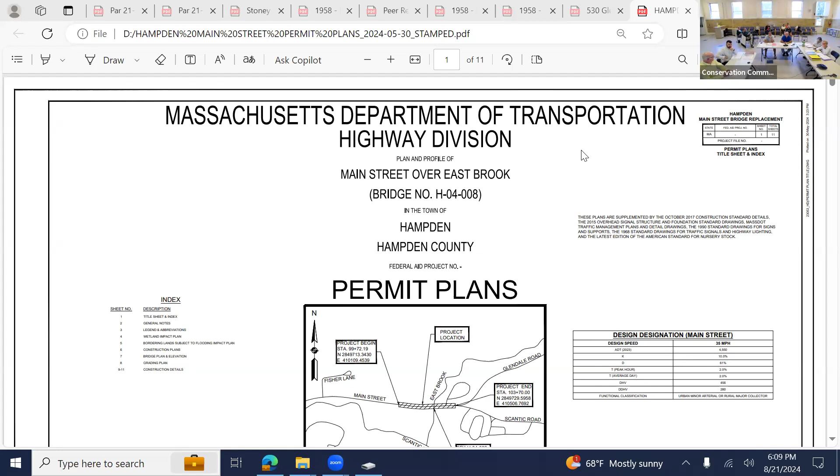If you don't mind going to page 4, please. So I just went through the impacts. This is basically a color-coordinated map showing where these impacts are happening. You can see most of the temporary impacts to the riverfront area are from regrading the slopes, shown in purple there. A lot of it's just regrading the slopes, since we're raising the profile of the roadway a little bit, which creates some grading to be done on either side of the roadway.

Then you have the greenish color, which is the temporary impacts to land underwater. A lot of that's for the removal of the existing abutments of the bridge, which we're doing by creating coffer dams around the existing abutments. So we're not impacting the actual center of the stream itself, but instead damming around the existing abutments to remove and then replace them. You can see how the green stays away from the center of the channel and stays closer to the abutments, because that's where most of the dredging is happening.

Then you have the orange, which is the permanent impacts to the riverfront area. A lot of that is because we're adding in the sidewalk and pedestrian curb ramps on either side of the bridge. We're also putting up updated guardrail at this location because the current guardrail is insufficient, which will also have pavement millings underneath. Technically those aren't considered impervious surface, but it's still a change of impact, since before that was just grass. So those are really our permanent impacts to the riverfront area.

And then you have your permanent bank impacts, which are in red, coming off each end of the bridge. That's because we are widening the bank a little bit. So at each end of the bridge, to get back to the normal bank width, we're having to move those banks out a little bit.

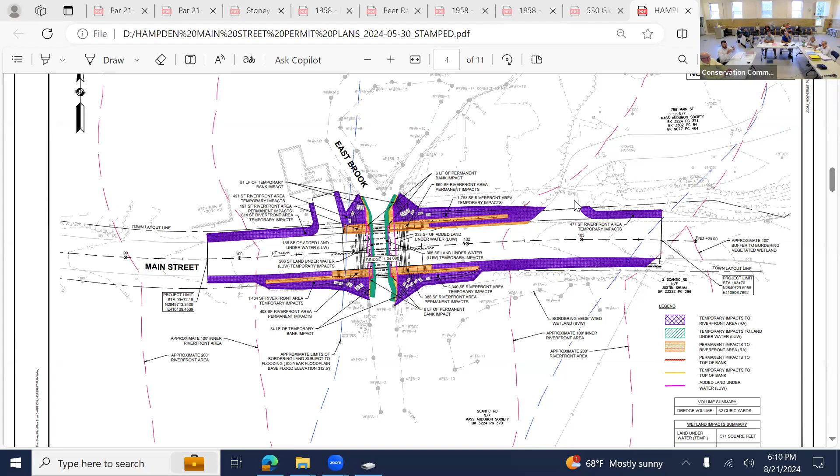If you go to the next one, please. Right here is the area where we're really adding that flood storage elevation. I talked about the 1,855 cubic feet. You can see in green here, a lot of it is happening where we're widening the channel underneath the bridge and doing a lot of bank impacts. You can see how we're flattening things out more.

If you look at the black lines on either side on the 4 quadrants of the bridge, we're really trying to cut in there more and create more of a gradual slope down to the brook itself. As of right now, it just goes right to the bank and drops straight down. So we're really trying to offer more flood storage in those locations for the times when the East Brook swells from big storms.

I'll pass it over to Steve. Sure, I'll continue. So one of the key things of this project is improving the structure that's there now in conformance with the stream crossing standards to the greatest extent practical. A lot of what's on this plan right now, we're calling new aquatic impacts, but at the end of the day, it's a wider river. It allows for greater capacity during storm flows, but it also allows for different types of aquatic passage.

Right now, what you have is a constricted stream where it's pretty much water face to bridge all the time. When we can show one of the sections of the bridge - I'm not sure what sheet it is in your package, Chris - with the widened structure, the main channel will stay pretty much as it is, but there'll be some added aquatic passage value.

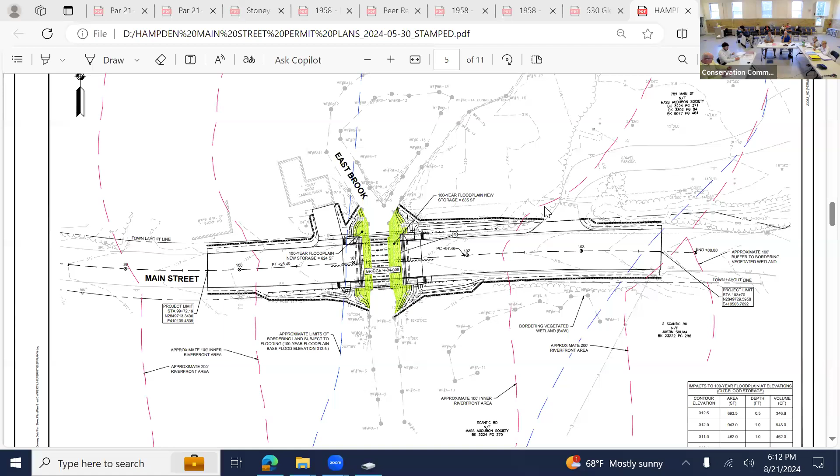You can go 2 up, please. Yep, right here. That gives a better layout of what the passage under the bridge will look like. If you could scroll down a little so we can see the bottom part - in this illustration, in the center, this is existing sheeting that was left in place when they built the previous culvert, and that's basically where your existing channel is.

During construction, coffer dams will be placed right at the face of where the existing abutment wall is, which basically projects up from where this steel sheeting is. This is where the stream gets wide for the wider structure, so there's actually a wider stream bed. There's aquatic passage up here on this bank. So it's both improving storm flows, but also improving the capacity of this structure to be a passage for other wildlife where it's not now.

I wanted to take a little bit of time to address the letters that you got from Division of Fisheries and Wildlife, in particular Natural Heritage and Endangered Species. What I have in front of me is the July 1st letter from Mass Wildlife, and I'm reading from the top of page 204. The findings of Natural Heritage are that this project as currently proposed will not adversely affect the actual resource area habitat, state protected rare wildlife species.

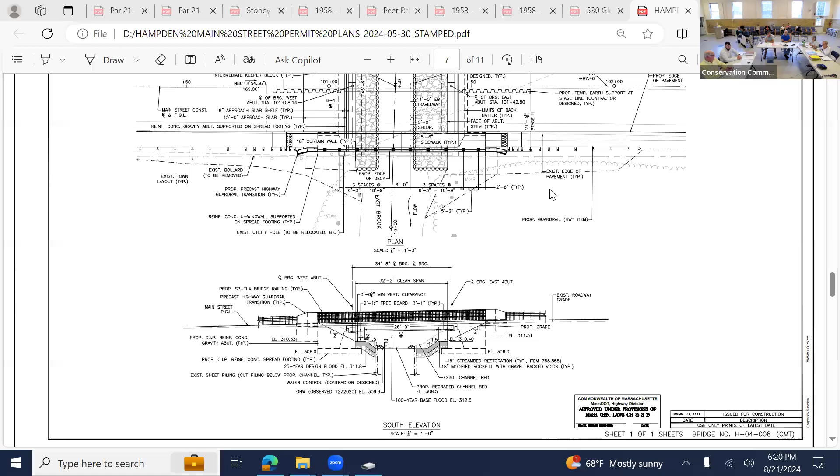This project, and we've had a lot of projects with this as well, it's going to be single lane during construction. So what they'll do is close one side of the road at a time. There'll be temporary traffic signals on both sides of the bridge, people will approach the bridge and only one side can go at a time. They'll build one side of the new bridge, then open that up, and all traffic will be on the new bridge, still single lane alternating flow. Then they'll build the second half of the bridge. The proposed bridge, maybe just scroll up to see the top part of that sheet.

The adjacent property, as you know, is Mass Audubon, so that's open space and would be very challenging at best to try to have a project that widened out beyond the existing layout onto the Mass Audubon land. It would require an Article 97 Act, and this project is not going to require that.

The existing bridge is kind of in here. You can see the shadow of it there, and I think it's right below the proposed one. So on the proposed, we're going right to the layout line, not outside it, which is why there's really not an opportunity to do a temporary structure. So the only way to build it is that single lane alternating approach.

Looking at the Mass DEP letter from June 11th, 2024, the first thing they mention is that the commission will need to wait to close the public hearing until Natural Heritage has issued a determination. That's what you have here — the Natural Heritage determination.

The second thing refers to invasive species. This project is really staying within the layout. The invasive species they're speaking about are outside the project limits on Mass Audubon land, and that's really their invasive species to deal with and manage. This project will rebuild the banks, and it does have planting plans we've coordinated with Mass Audubon, doing some bank restoration at least in the vicinity of the project.

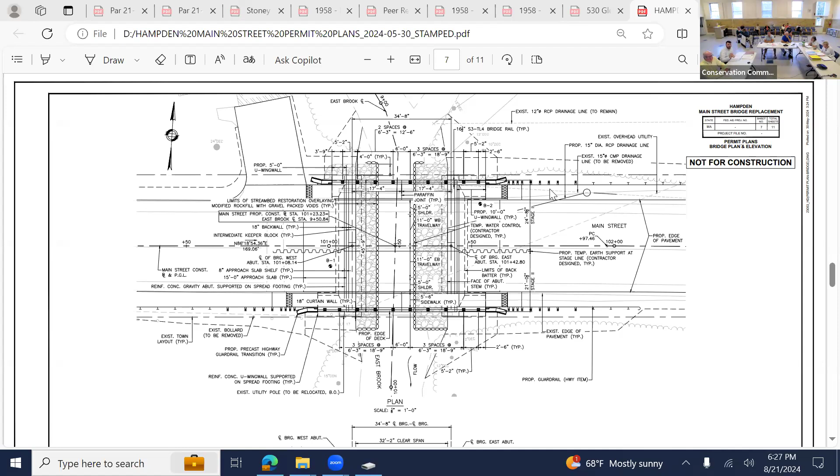Do you have a planting plan? We do have a planting detail - if you scroll down a couple, there's a detail, keep going... one more. That's it right there, and I also have plans you guys can look at. It goes through what exactly is in the wildlife seed mix itself, the New England conservation wildlife seed mix. It's in there, in the report, in the wetlands section.

Are they planting elderberry or something like that? Yes, we've gotten some recommendations from our wetland specialist. Maybe you can find that to point them to it. The areas we have are really small within the limits where we disturb the banks, but we have restored them with that. There is an appendix here I was going to find - it's one of the appendices where they go through, based on our plan, showing pictures of areas and potential areas for plantings.

Let me find it here, I believe it's... so that will be in more detail at some point, once the people get the contract. We do have a plan that calls for the amount of planting, so there is a plan sheet that shows that planting area, and there is a sketch in one of these - trying to get you to the appendix here. What is the time frame on this?

Everything's in there. So we're going to be completing the design in the next 6 to 8 months - this design has already been submitted to Mass DOT for Chapter 85 review. And along with that, it's sort of a function of the funding. As Chris described, we've been working with the town for 3 years, advancing this project through the MVP process - this is the third year of that development, and it's basically the final design. We are at 100% design. The design of the structure isn't changing, it's just getting those approvals from Mass DOT.

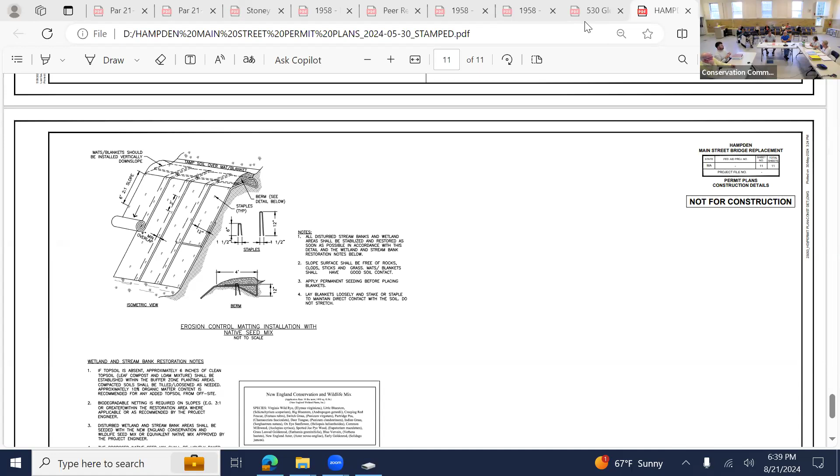Okay, they're done, thank you. Great, thank you, thank you all. Here's a card, we'll be around. Oh, thank you, you can always reach out. And I'll get this out to you within 21 days. Perfect, sounds good.

All right, what's the next one? Well, the next thing, even though the orders aren't totally done, if you guys could sign it now, sign the signature page now, so that I wouldn't have to call you separately. Sure. Yep. Just one? No, I've got two. Okay.

The wheel is in the closet upstairs. We'll get it. Here's the other one, well, he has his own. I have a 100-foot tape somewhere. No, he said there's a wheel down in the closet downstairs. Okay, I'm gonna go grab that.